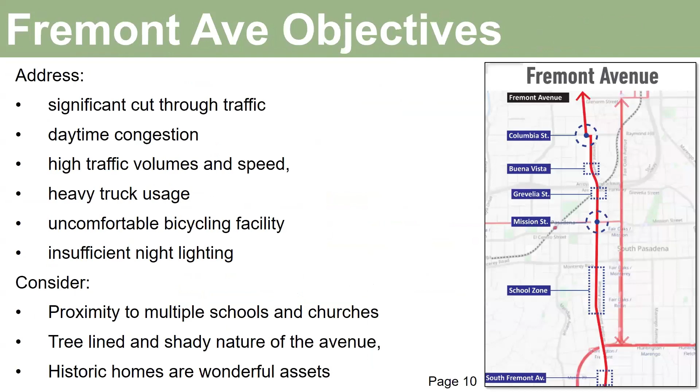So last month we went through some of the Fremont design concepts. We'll just kind of slowly scroll through those slides, Philip. We don't need to revisit all these, but if there are questions or we want to return to any concepts here, or talk about some of the earlier discussions in the Toole Design memo, we can do that before we move on to the Huntington design concepts.

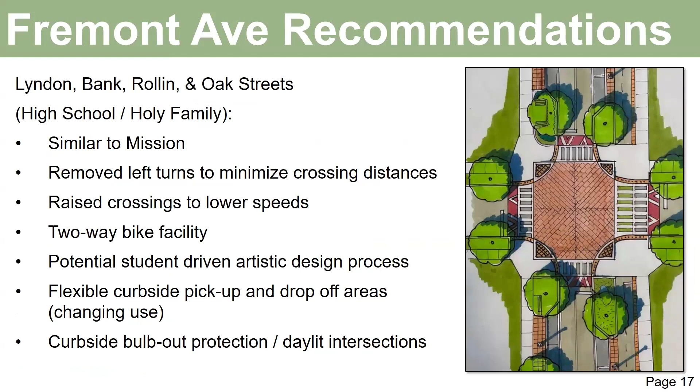Chet, I was hoping that we could just spend a couple minutes on that U-turn proposal. I guess it may be out of the scope of what they were going to do, but it was a suggested project. We also have another project we're considering for the loop ramp, which would relieve the congestion at Fair Oaks and the Arroyo Seco Parkway. So I asked that we go to that before we dive into the Huntington projects, if okay.

Absolutely, yes. Philip, do you mind jumping to the attachment? So when we executed this process with Toole Design, even though we knew the initial focus would be on the Fremont Huntington corridors, we didn't want to not tie in Fair Oaks, because obviously these are all tied together and connected. So the charrette process included three corridors, including Fair Oaks. Now we'll likely be able to tie in some of the Fair Oaks ideas into either the existing north-south ITS corridor project, the future MIP project, which right now is focusing on Grevelia and State Street, the future loop ramp, and then a couple other small projects we have.

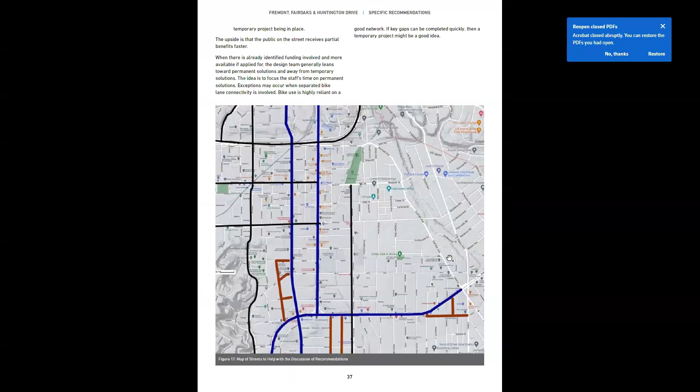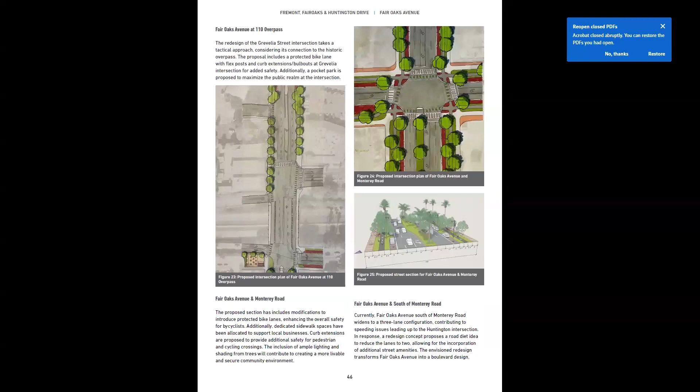So we did ask Toole to give us the design. Philip, I want to say it's like page 45 or something like that. Jump to it. It's a picture of... if you want to keep going, I will find it here. It's a picture of the Fair Oaks. There we go. Yeah, go a little bit further. All right, go back. Can you zoom in one page back? Yeah, and then can you zoom in the lower right hand corner?

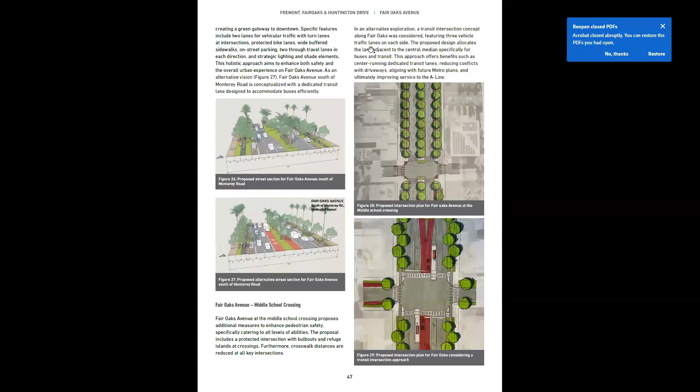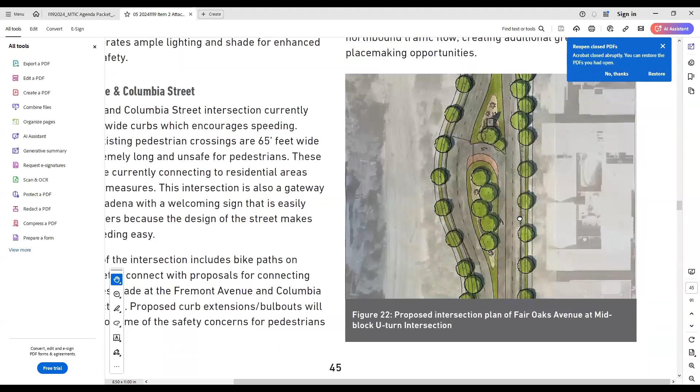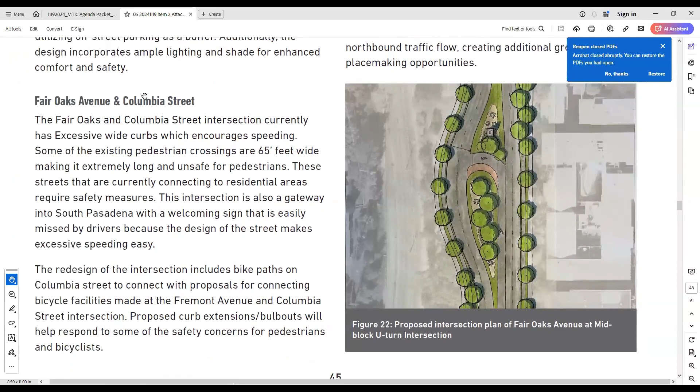So while folks are pulling that up, one of the ideas that was proposed—because when Toole Design came in, we gave them every resource we had, all the various master plans we had, all of our project plans, what our future projects were—one thing they took a look at was the congestion conflict situation near State Street in the valley of the 110.

So again, it would expand onto what is currently private property, but the idea is the city would acquire it in order to turn people around so they can head south and enter the 110 south on the existing southbound. So that's one idea that they came up with.

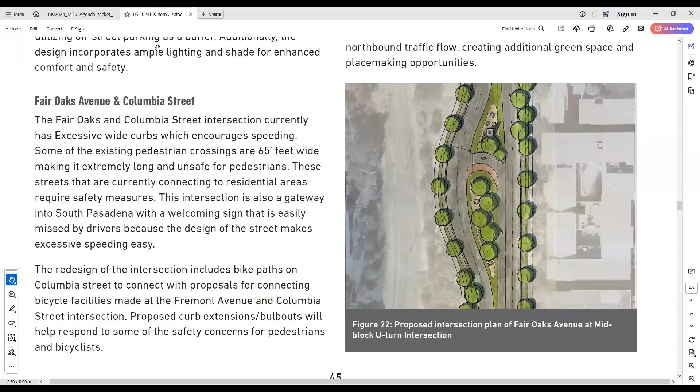And the 17 million is Measure M and Measure R. Yeah, there's 6 million of Measure M active transportation money and 10 million of Measure R MIP money. And is the 17 million - do we have an allocation so much for Fremont and so much for Huntington, or does it just depend on what this process results in? Sure, so the allocation is actually for both at the same time. The $6 million active transportation grant includes both Fremont and Huntington, and the $10 million mobility improvement grant also includes Fremont and Huntington. So the allocation isn't so much about the different locations, it's more about the eligibility under both of those grants.

One seeks to increase pedestrian active transportation elements. The other is essentially the transportation system management alternative from the cancellation of the 710. So it's intended to meet the needs of mobility as a result of 710 access.

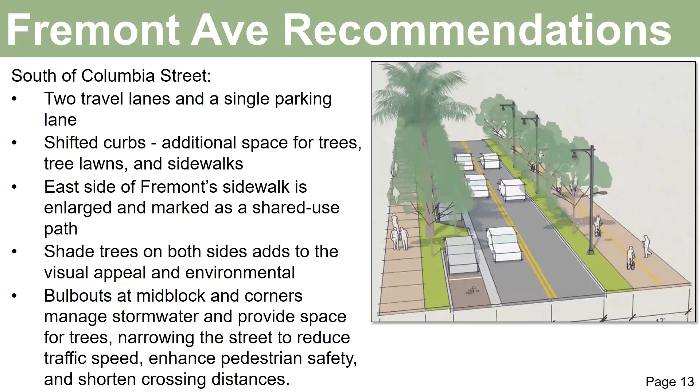Last question for now - is there any piece of this being considered as sort of a reserve for maintenance? A lot of these proposals include some pretty impressive landscaping and striping measures and such, and just given history, I'm wondering if there's going to be some amount of money set aside to maintain all of this once it's installed, or is that just going to be general fund? It's a good question. All of this money is designated solely for environmental, design and construction - no maintenance, no right of way acquisition.

Maintenance of concrete and pavement would be through our existing avenues: gas tax, local Measure and Measure R money, general fund and SB1 money. Other landscaping would have to be through our lighting and landscaping management district or our general fund landscaping amounts. So yeah, there's no additional maintenance set aside for this project.

There's already landscaping along Huntington and Fremont, so whether or not we expand that would really change the amount we need. If there's not a wholesale change in landscaping elements, or maybe even a reduction in high maintenance landscaping elements, then hopefully we can manage those maintenance costs out of the project.

Thank you. And just two questions. One is, should the money get allocated for the federal grant potential, should that be deemed that we would fulfill the feasibility for the U-turn alternative, can that money then be redistributed elsewhere? Obviously we need some of it for the elements we need, should that be a desired outcome, but could the rest of the money be utilized elsewhere? And the other question is, the money in the 10 and the 6, can that also cover infrastructure such as bus shelters, bus benches, some of those mobility related support infrastructure items we might want?

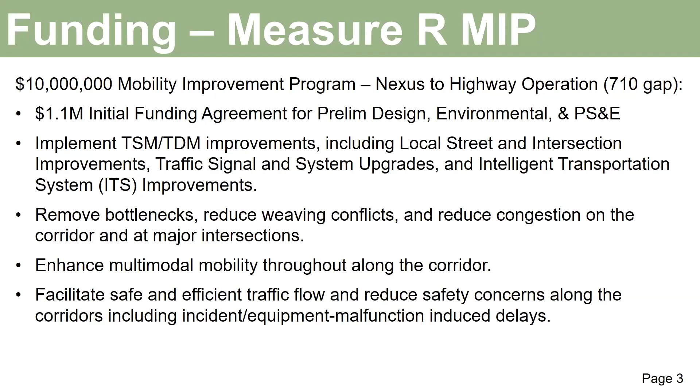Yes, so the answer is yes on both questions. Phil, do you mind advancing the slides? I couldn't do it here, right there, perfect, so those two next.

So to the answer to the first question, right now the city has essentially allocated its Measure R MIP money, 80 million, into 3 locations. 10 million of that is to this project, the 10 million Measure R component. The other 70 million are focused on the loop ramp project and the 110 northbound off ramp project.

Let's take Pasadena for example. Pasadena had a $240 million allocation, and they had a slew of projects they were evaluating with that money, even more project value than they had funding for, because their strategy was their projects are going to move forward, so they'll utilize the money on the highest priority projects. Contrast to that, we have our money focused on a couple of projects. If we were to not pursue those, then we would have to evaluate what other projects might be eligible for it.

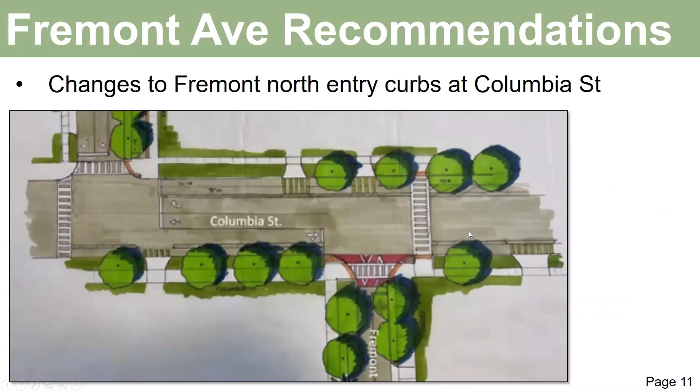Okay, so jumping back onto Huntington. Just like Fremont, we'll start that process by asking what are the objectives of this project. Again, the scope was really, the primary focus was to bring community groups together, get conversations going, find out what the problems were, and where we need to focus resources. It was really a planning step before the design process, and that was the value of doing that.

So they found the objectives of the Huntington project were to reconnect the city across the corridor, increase the quality of life for people who live along Huntington, which includes single family residences, multifamily, and commercial, and increase access to businesses on Huntington. You'll see that in some slides, especially the south side and Fair Oaks. And then reduce the traffic volume and speeds along Huntington. We know we have some instances of speeding, especially on that curve near Pine and Court Street on the east side.

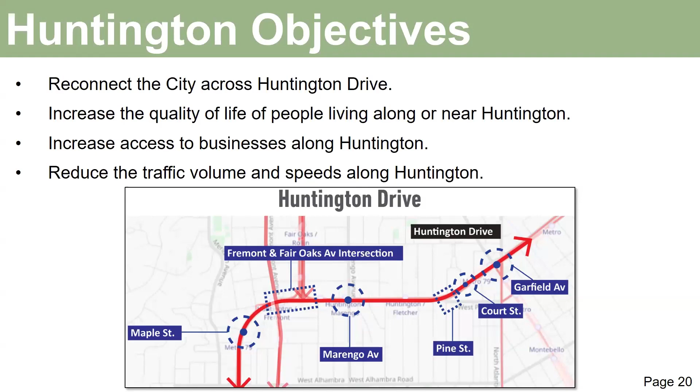So the recommendations that came out of the design process were interesting. The largest, most comprehensive thing you'll see is the road diet for the entire street. Right now, we really consider Huntington to be 7 lanes, 3 lanes in each direction, plus turn lanes in the middle. In some locations there's a drivable median on Huntington, as you're familiar. Across the whole corridor, they recommended reducing that down to 5 lanes, and we'll look at how they did that. They proposed separated bike lanes that would offer some connectivity.

LA on the southwest side currently has a bike lane. Alhambra is planning a bike lane from the southeast side. And then, based on how San Marino and our other San Gabriel Valley cities configure their sections of Huntington Drive, it's possible to have a bike corridor. So the remodeled area incorporates that into this section.

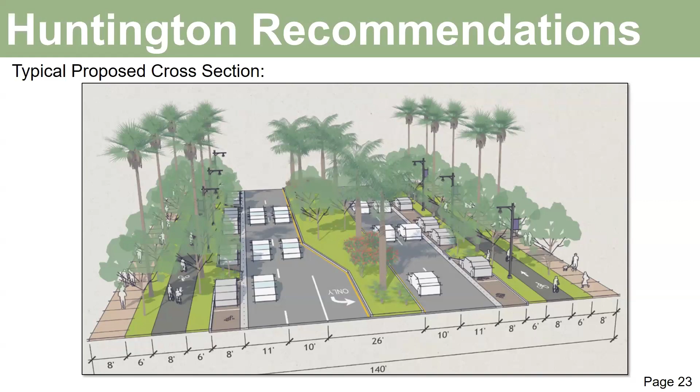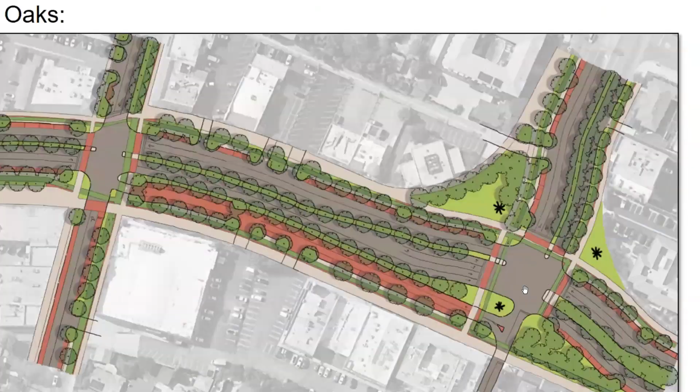So as you're proceeding westbound on Huntington, how do you enter this frontage road? If you're heading westbound on Huntington, you would take a left here and enter the frontage road right here. I have to be very precise with my pointer, but it's right here. So you're taking a left, basically. Hopefully that's a better description.

Which currently right now, you would still need to make a left there and go all the way around the block to enter from Fremont. Yeah, currently our operation is actually to go down past Fremont and take a U-turn farther southwest. And because we removed the U-turn at Fremont, we put in the right turn. Yes, exactly, it was a strategy there.

So what driveway is opposite Fair Oaks Avenue on the south? Who does that serve? It might be helpful, Bill, do you mind pulling up that office building. The big four-story office building right at the intersection, and Bagnell real estate, if you don't mind, just pop up the browser. Thanks so much. It's good to see. Then there's the cleaners, and through there, the office on the corner.

Yeah, that's good, that's the one. Turn it on, zoom a little further with this Corolla law firm. Zoom in over here, yeah right there, exactly. It's a little offset, but that's the private.

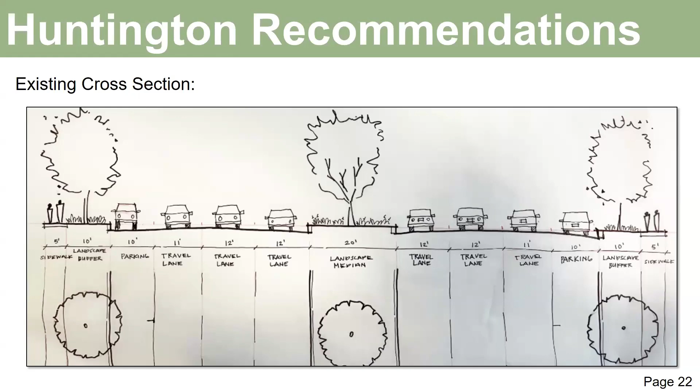Thank you, Madam Chair. I just want to say I love this concept. I like the frontage road, I like the concept, the cross section, the way it's designed. And it really is forward looking, given the fact that there could be further development on Huntington, and this supports, I think, more pedestrian and cycling routes. So I think it's terrific.

I agree with some of the comments that I don't understand why we need 3 lanes on Huntington. I think 2 should be sufficient. So I like a lot of these ideas a lot, it's just a couple questions. And I guess we're early on in this.

We have the fortune of being between Alhambra and the city of LA on Huntington Drive. As far as I recall, they have 3 through lanes in each direction on their segments, right? So if we were to cut down from 3 to 2, which conceptually makes sense, that would require some level of coordination with them, right? And in that regard, I think the city of LA has some kind of Measure R project forward, right? I don't know if you're familiar with it or if there would be some kind of synergy between their project and ours, but I just wanted to make that comment and ask that question.

Yeah, I think there would definitely have to be some synergy, so we would provide our designer with the Alhambra plan and LA's project concept. If you look at LA, for example, they have an existing bike lane and 3 lanes, and their parking lane is really narrow - I don't even know if it's a full 8 feet. So imagining their configuration, they would have to reconfigure, and Alhambra is definitely planning a reconfiguration because they're proposing a bike lane.

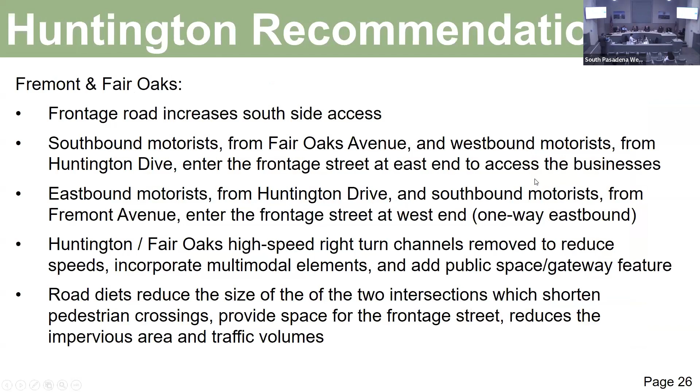For the westbound to northbound right turn, it shows an asterisk, but it doesn't show any landscaping in that area - what's intended? Sure, they were really just trying to highlight a new green space so the city could imagine what they want to do with it. So it's not just landscaping, it's just showing that that's new landscaping. The northern two sections, they envision little park areas, likely not on the median there, but that might be a nice place for public art or city signage or something like that.

So no trees there? They didn't say we couldn't do that - they just wanted to emphasize that this is kind of like a blank slate to do something with that didn't exist before. That's what the asterisk is for.

For any future city council people in the audience, I live in this area and I need some place to eat down here. Sure, yeah, of course.

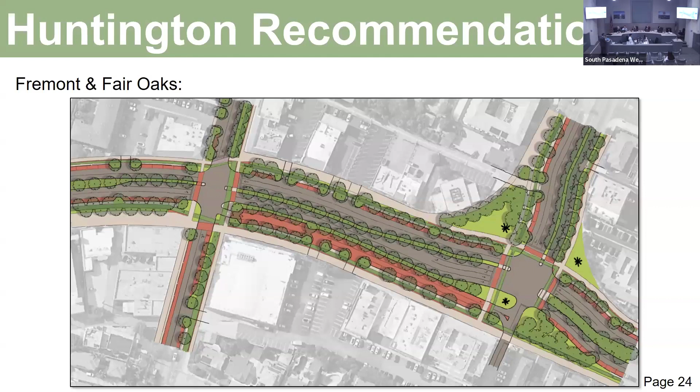Okay, so let's jump to the next recommendation on Marengo. We've already spent a bit of time on this intersection because we had that study we looked at a few months back, and the protected bike lanes configuration continues here. This is a substantial change to how Marengo is configured, because right now we have class 2 lanes on the street. Here they're showing protected bike lanes, those green lines, on the opposite side of the parking, and then up alongside the crosswalks there.

So narrow travel lanes, addition of street trees, bulb outs that aren't on Marengo currently, and similar to some of the other designs we saw last month, raised crossings. We do know that this is a heavily crossed area, and you're all experiencing those issues. So this is what Toole recommended for Marengo enhancements. And Ted, this is also where we have the crossing guards. Exactly, right now we have 2 crossing guards on either side of Marengo.

But to your point, yes, regardless of whether we implement that particular technology, all the signals in the city are going to be advanced controllers, advanced detection systems. We're moving away from these loop detection systems. So even if we don't implement these types of things—that's a really good point—there will have to be dedicated maintenance resources for these new signal systems no matter what.

I think in here there's also Marengo recommendations. It looks like radars. Exactly, yes.

Question, I know we keep going—two quick questions. Bulb outs are at each corner in this design, right? Is that correct, or is it only certain corners here? Yes, because the lanes are being narrowed, or the number of lanes is being reduced, so you've got a bulb out at each corner.

Exactly. Okay, so as it stands now, Huntington Drive turning onto Marengo, whether you're going west or east, is there a dedicated right as we sit here, or not? From Huntington to Marengo, I don't believe so. Okay, and the bulb outs—tell me if I'm wrong—are they not only benefiting peds and cyclists, but also sharpening the angle for the right turn? Is that correct?

So basically, if these bulb-outs are put in as designed or planned, the right turn is going to be a little slower to maneuver, like a reduced radius. So this business of the raised crosswalk, whatever we're calling it, we've sort of beaten it to death, but I just wonder if it's necessary if we're already making the right turn slower and tighter, more controlled than what it is currently. So it isn't really necessary, maybe it's just something nice to have.

Sorry, but I gotta mention that. Again, Commissioner Abelson mentioned that when you take out the area where you can make a right turn outside of the through traffic, you're more inclined to wait for the pedestrian to cross the street or for the bicyclist to pass by before you turn. Now what we have here is a through-right lane, so when you've got traffic behind you, you're less inclined to wait because you don't want to be rear-ended. So I think as a safety measure, you really want to have that space to make a right turn outside of the through lane. And because this is one of our most traversed intersections by students, we have 2 crossing guards here. Safety is a priority.

You want to make sure that you stop and yield for pedestrians and bikes as you turn. And when you use the Toole design and you take out all the right turn lanes and such, you don't have that. So as a safety measure, I really think we need the space to make a right turn. The parking space basically is what we have today - I don't think we want to give that up at this intersection.

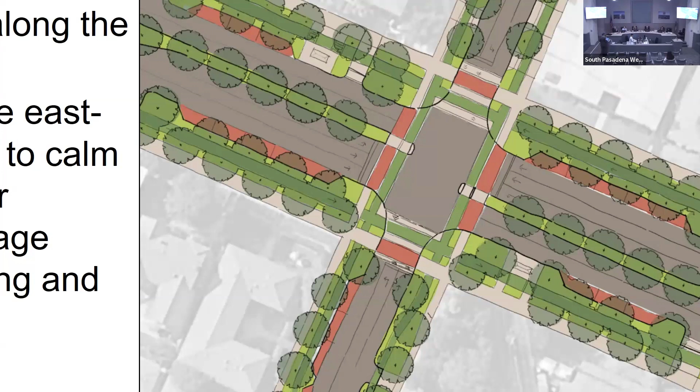Okay, thank you for that. So let's jump on to some of the other concepts here. So Court Avenue, we're all familiar with this. Currently it's a very long, unprotected crosswalk. It's about 120 feet wide.

Continuing this road diet concept on Huntington, in this location they are moving the bus stop. Currently the bus stop is on the northeast corner, so it's being moved to the northwest corner, away from the crosswalk. And then they've implemented this two-stage crossing - currently the median nose doesn't cross the crosswalk, but now you have that central median nose, introducing two refuge locations. And then you have the south frontage road, which provides some buffering and on-street parking.

So I think the tool concept starts a little closer to, past Dos Robles - basically east of Dos Robles is where that road starts. I think the south side is easier here because you don't have as many driveways on the south side. The north side has many more driveways, right?

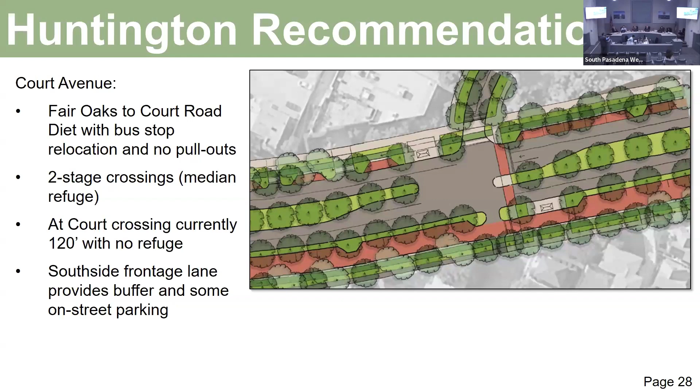Sorry, Marengo, and then Fletcher, yeah. Yeah, so it's Fletcher, I believe. And there's a bus stop here.

Right, exactly. So this is also another concept that we didn't really see coming. It's a little bit hard to see, but at the moment, this is Electric Avenue or Electric Drive. I don't remember the designation for this one. And then that's Wayne, I think.

Right now there's an access road that goes through here and connects to Pine Street. So the tool is recommending, to reduce speeding and cut-through traffic from people trying to avoid the Garfield-Atlantic intersection, to actually remove that access route right there, which is an opportunity to add green space.

Again, the bullet points are: avoiding the queue at Garfield, removing the high-speed shortcut, and discouraging cut-through traffic in the neighborhood. The interesting thing is that these homes right here don't have driveways on electric. There's basically a network of walkways through the homes. So removing that, there's nobody really accessing their home from that area, and there's no parking on that access route. So it makes sense, it's just a pretty large reconfiguration in the area.

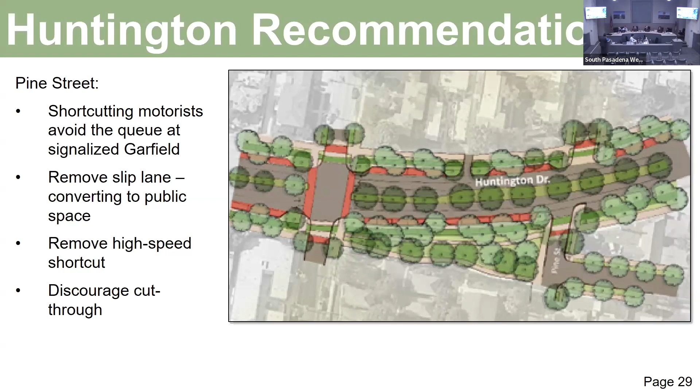Sure, but I like the concept, it makes a lot of sense. The only thing I'd say, my continual plug, is to be careful where we put bulb-outs for people making a right turn from Huntington Drive onto those roadways. It might be helpful for them to have a little protected right-turn lane to be able to do that, instead of having all the traffic coming right behind them while waiting to make that sharp turn. So that's something to keep in mind if we do that, but I like the idea.

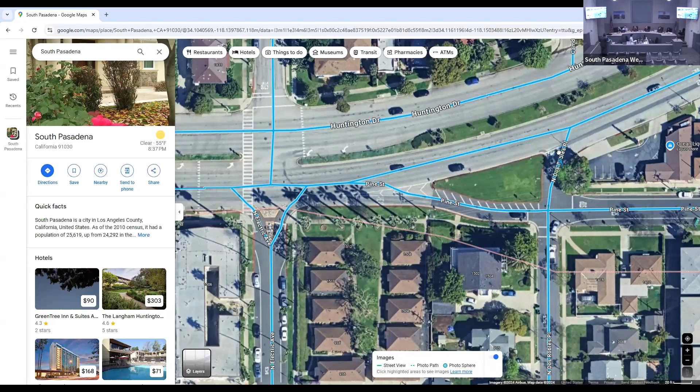It's also difficult when making a right turn right now out of Dos Robles to find the gap, because you don't know if traffic is continuing east on Huntington or making that right on Pine. Does that make sense? Like you're heading north on Dos Robles and want to make a right turn onto Huntington. You don't know if the traffic in the third travel lane is going on Huntington and continuing, or finding a gap to turn onto Pine. Understood.

Because right now, if you were to go to Ralph's, the shopping center, to head back to South Pasadena, the movement you take is: you take a right turn and head down Atlantic, you make a right turn on Pine, you go down Pine, you make a right turn on Dos Robles, you make a right turn on Huntington, you go all the way across and then make a U-turn to head west on Huntington. That's the traffic movement to basically exit Ralph's.

Because there's really nowhere to make a left. The only way you can do it is if you can get out and the traffic's not backed up, is to go up and make a U-turn at Dos Robles, and then come back that way.

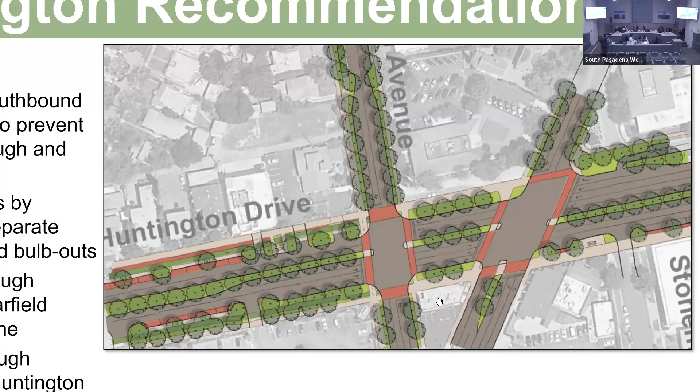Well, I mean, you have—I don't remember what this is right here, but you have a building here. No, old Tui's. No, Tui's was in the In-N-Out parking lot. Oh, the pizza place, or now the, whatever it's gonna be. Noodle place. Right, and there's a burger place. It's Pizza Hut and Wing Street.

Zooming out, a community challenge. Right, come to us with a way to simplify this intersection.

Yeah, a lot of volume off of Atlantic into the In-N-Out parking lot there on the east side. So yeah, I think really what they're trying to accomplish is just the interface into South Pasadena.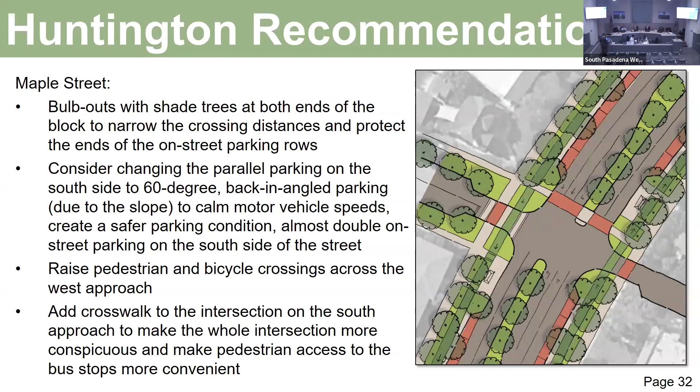So I think that's the last design concept. I added this slide just to remind us of some of the other recommendations that came out of the Marengo study, about the offset and moving the median noses, which does have a negative impact on the bike lanes. AGA's recommendation was to reduce the bike lane length towards the intersection there. But certainly the signal improvements that can happen at Marengo, as well as the other Huntington intersections, we think should definitely be included in the project scope.

Question: 8 inches, 12 inches, vehicle head indication, what? Just watch that.

Sure, so basically the size of these signal heads, they're recommending to make bigger. That's not a big project, right? That's a work order, isn't it, for someone to just order the bracket for the signal head? The signal head itself, yes, but if you wanted to also change out the poles, the mast arms, and add the detection systems, that would be bigger. But the bigger signal head alone is pretty simple. I'm just sharing what the recommendations were from that study versus what the Toole recommendations were -- the Toole stuff is going to require a lot more work and planning, including design and community engagement.

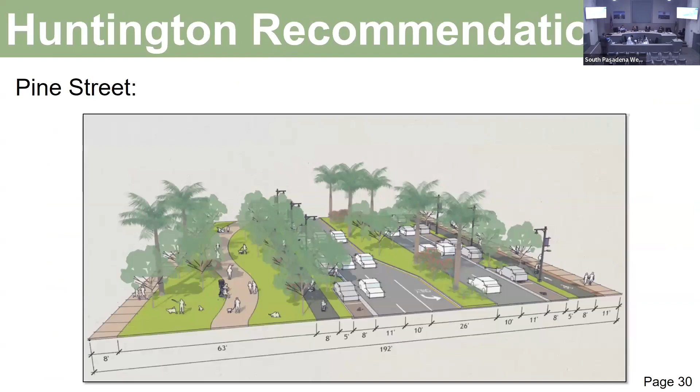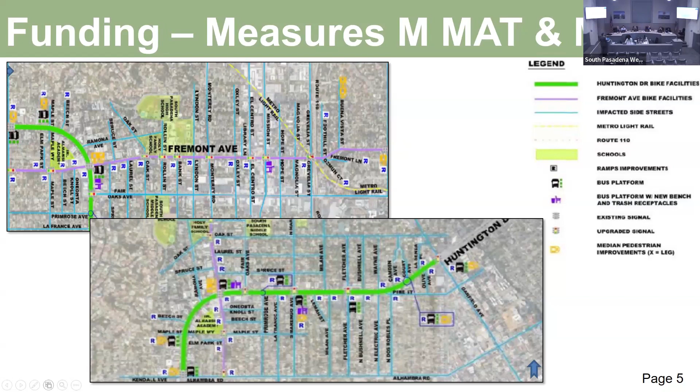So we have so many ideas here, especially with the Toole designs, that we could spend another $2 million on. So we did put in a funding request for that extra $2 million, and we focused on these intersections -- I'm pulling that up here. We mentioned this briefly at our last meeting.

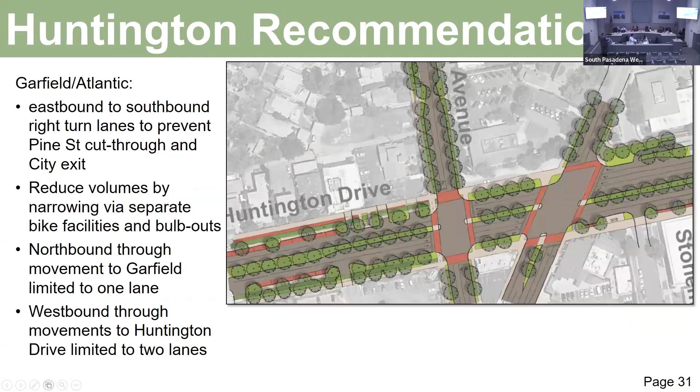These are intersections where we thought we have additional scope we could add. For example, at Buena Vista we have these islands, crosswalks, and new curb lines. At Fremont Mission, though we might not necessarily implement the right turns the way we talked about, there's certainly an opportunity to enhance this entire intersection given its proximity to Mission Street. And at Marengo and Huntington, there's quite a lot of ideas for improvements we could make, including upgrading the signal.

So we proposed those ideas, but according to the funding source, everything we just mentioned is already in the scope. That makes it a little challenging because the scope is very comprehensive but also kind of broad and vague. So we're going to try again.

One of the concepts I brought up earlier is that the project doesn't specifically call out any bike lane infrastructure. It calls out bike routes and bike facilities, but doesn't talk about bike lanes. And if we like the idea of class 2 bike lanes on Huntington, which is part of our bike plan, that's why we started exploring how to do this without a major reconfiguration of Huntington that we can't necessarily afford on this project.

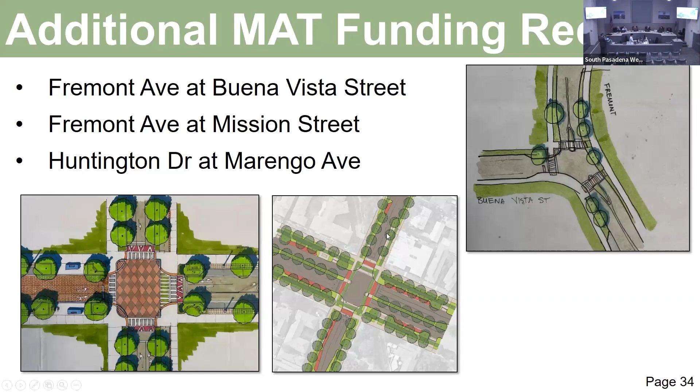Continue. So Ted, you're going to show us next steps, or do you need specific recommendations, or have you got direction? Sure, so this was just to share with you and remind you about the roadway condition next to the street we just talked about. Lastly, if you go through the Toole Design memo, we didn't cover everything in that memo, Fair Oaks, but there's other brief discussions on some of these other areas of town that you might find interesting.

And then next steps. Just like I mentioned earlier, we're really just trying to get into the environmental and design phase. We can start spending this money. We need to start narrowing down design concepts. The design consultant's going to have to help us with that.

We are going to source our on-call list and do a small solicitation with that group. There's a lot of talent there, so we really just have to find the right designer that can take us from where we are through to the construction document phase. And we will be back multiple times to talk this through with you as we narrow that down.

And not just with you, but with the public as well. So we won't probably have as large a charrette process as we did previously, but we'll certainly have our design consultant and a community engagement team start to introduce these ideas in some meetings with the public to talk them through.

And Ted, on that, releasing the RFP and doing the environmental work, do you have a time frame you're thinking of, or what's the scope for the timing of those? Sure, it's really just staff dependent. I was going to share this in my later comments—we don't have any engineers right now. We're trying to hire.

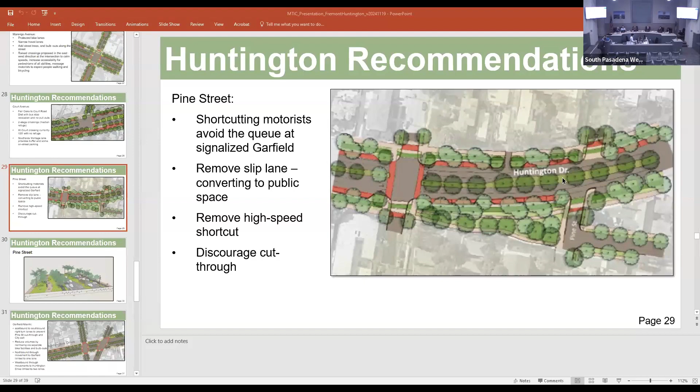Page 2 of the minutes, fourth paragraph that starts with Chris Miller - just add a sentence at the end: he asked about potential short-term measures to address the traffic issue. The next paragraph is missing a period at the end.

And then the paragraph right after that, the Rick Schneider paragraph, second line says he was on this commission - I would just pick one, probably strike committee. That's why.

Yes, on page 3, under number 3, approval of minutes, second paragraph - I think the sentence that begins with Commissioner Fisher ought to read: Commissioner Fisher responded to Commissioner Abelson's inquiry that, let me read my own writing, he offered grammatical modifications to his comments to the minutes of the meeting of September 17th, 2020.

Oh, I asked what to change. Right, yes. Super minor, and the call to order should be October 15th.